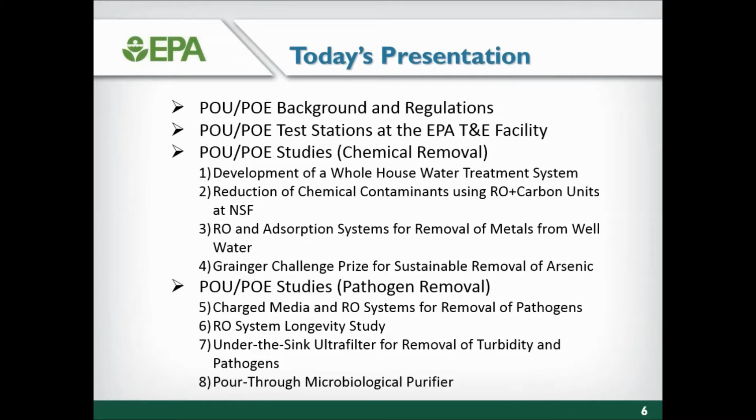The research studies described in this webinar are designed to provide background on the capabilities and testing protocols of household water systems. In today's presentation, I will quickly go over general background and regulatory implications regarding the use of point of use and point of entry, or POU, POE devices. This presentation will focus on the chemical and microbiological removal capabilities of household water systems based on studies conducted at the U.S. EPA Test and Evaluation Facility in Cincinnati, Ohio. Later, Cindy Clevens will provide a regulatory perspective on the use of POU devices in New Hampshire.

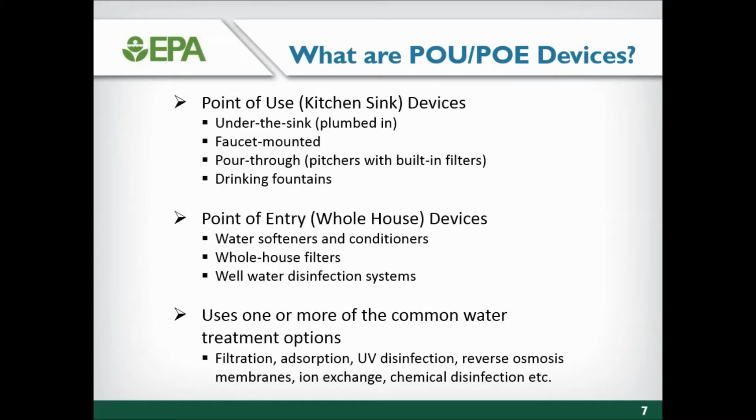Point of use or kitchen sink devices are installed at or under the sink or on the end of the faucet and treat only water used for drinking. Point of entry, or whole house devices, treat all the water entering a building. POU and POE devices typically use one or more common water treatment options like filtration, adsorption, UV disinfection, reverse osmosis membranes, ion exchange, and/or chemical disinfection.

Point-of-use devices can provide consumers in homes, businesses, and apartment buildings with clean drinking water with improved taste. They can be designed to remove specific contaminants or may inadvertently remove unregulated contaminants from potable water.

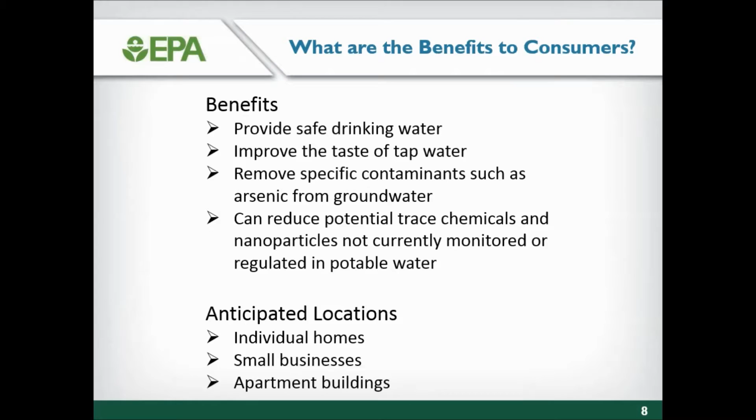POU systems can prevent illness and improve public health if properly selected, installed, operated, and maintained. They can protect households from untreated water and treated water that has been contaminated in the distribution system. However, they are designed for clean water sources or tap water and should not be relied on for untreated water or wastewater except during emergency situations.

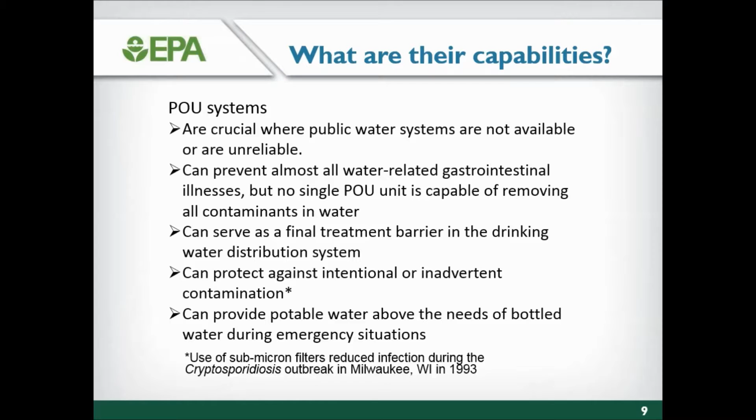POU devices must be owned, controlled, and maintained by the public water system or by a contractor hired by the public water system for compliance with an MCL, and must include mechanical warnings or auto shut-off capability.

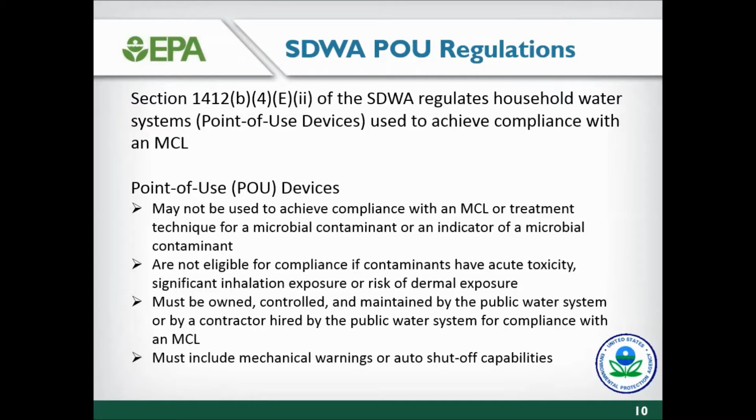Only POU devices that have been independently certified in accordance with ANSI NSF standards can be used as part of a compliance strategy. Several nonprofit organizations in the U.S. independently certify POU devices or verify their removal capabilities, including NSF International, Underwriters Laboratories, and the Water Quality Association.

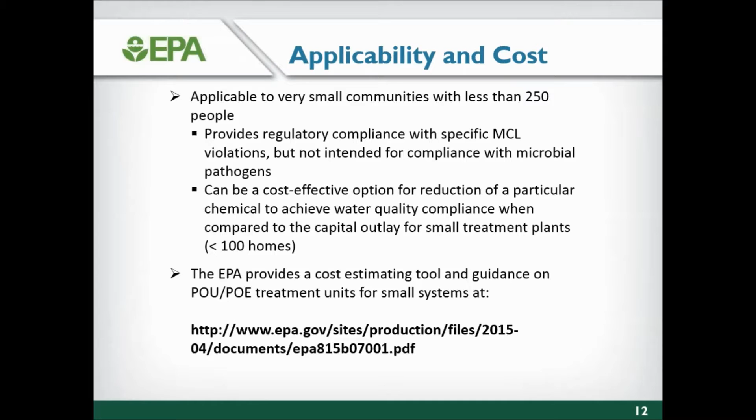Household water treatment systems are applicable for regulatory compliance in very small communities of less than 250 people. POE devices can be a cost-effective alternative for chemical removal in communities of less than 100 homes. EPA has developed a cost estimating tool for POE treatment units with guidance at the website link shown here.

The U.S. EPA Test and Evaluation Facility in Cincinnati, Ohio is a multifaceted research facility with bench, pilot, and full-scale environmental systems. The high bay supports a point-of-entry test station, supporting relatively high flow rates and continuous monitoring of several water quality parameters.

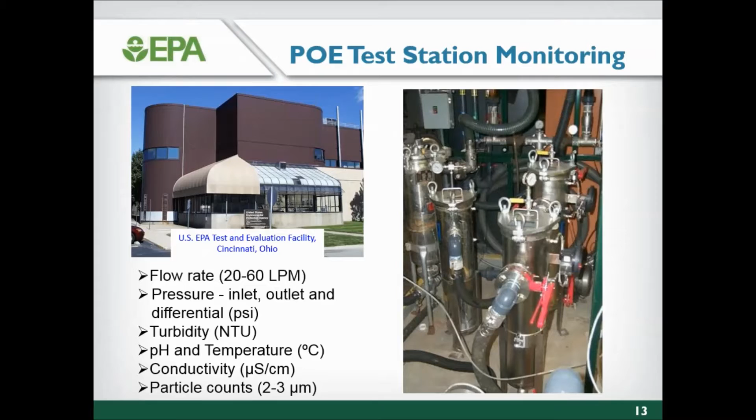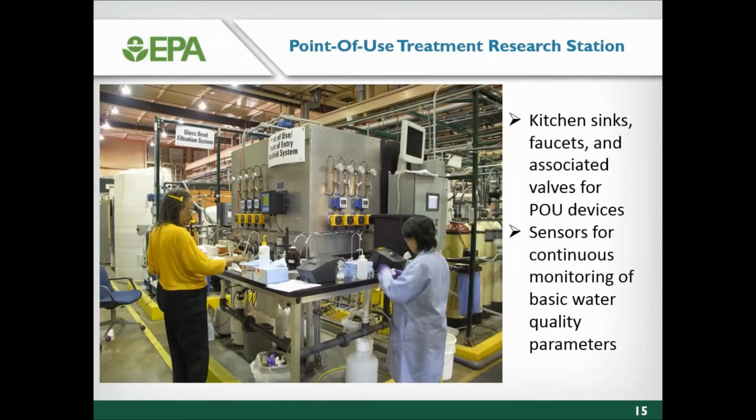The T&E facility also has a point-of-use test station with 2 kitchen sinks and 5 point-of-use faucets and continuous monitoring of water quality parameters. On slide 16, Cincinnati tap water is dechlorinated and deionized for use as a point-of-use test water. Test water is then recreated based on the desired experimental water quality and contaminants of concern. Automated sensors are capable of tracking and data logging flow rates and water quality parameters throughout the POU research studies.

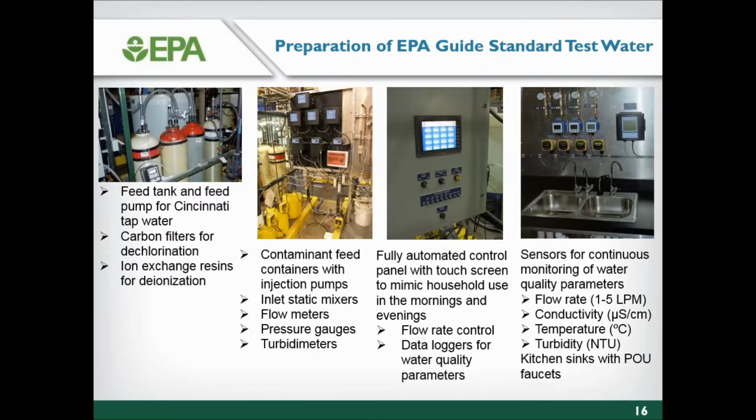Point of entry study number 1 was conducted on composite cartridge filters with UV lamps. EPA and Harmsco Filtration Products developed a Cooperative Research and Development Agreement, or CRADA, to study the household water system shown here. Harmsco is based in Florida, where source and tap waters typically have a yellow tinge. This 15-gallon per minute household filter is capable of removing the yellow color, inactivating pathogens, and improving the taste of drinking water in the home.

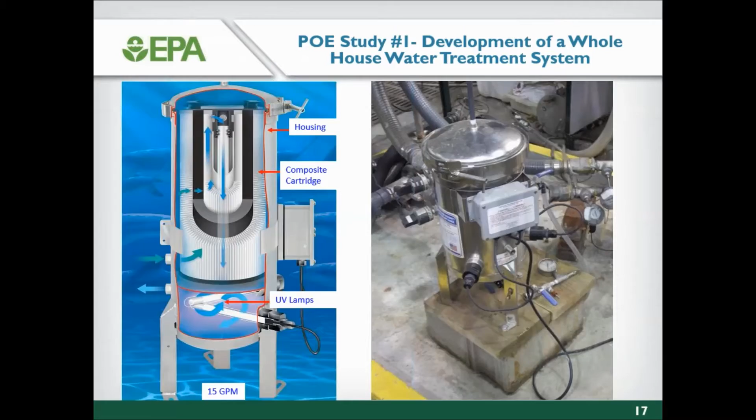The composite cartridge filter media is constructed of an antimicrobial pleated 20-micron outer filter, an activated carbon extrusion, and an antimicrobial pleated inner filter with a nominal pore size of 2 microns. Filtered water is then disinfected with low-pressure UV lamps.

The composite cartridge system demonstrates removal of turbidity and cryptosized particles. For influent turbidity levels between 1 and 3 NTU, the effluent quality did not deteriorate due to the dirty condition of the filter and high feedwater turbidity. However, the head loss pressure increased rapidly, indicating the need for low feedwater turbidities.

The system showed excellent removal of chlorine, trihalomethanes, and diazinon insecticide, and adequate removal of MTBE and haloacetic acids. The extruded carbon was blended with ferric hydroxide for arsenic removal with negligible results.

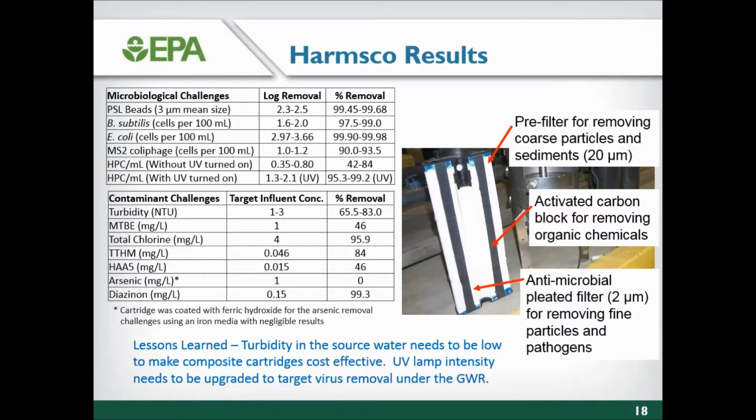Under lessons learned, these studies were focused on the removal of cryptosporidium under the long-term 2 enhanced surface water treatment rule. Now that the focus has shifted to virus removal under the groundwater rule, the UV lamp intensity needs to be upgraded to target UV-resistant viruses such as adenovirus.

On slide 19, in POU study number 2, EPA and NSF studied the reduction of chemical contaminants in off-the-shelf reverse osmosis and carbon units. Experimental testing of multiple lots of multi-stage kitchen sink systems was completed at NSF in Ann Arbor, Michigan. After preconditioned service periods, RO membrane components were studied first without sediment or carbon filters.

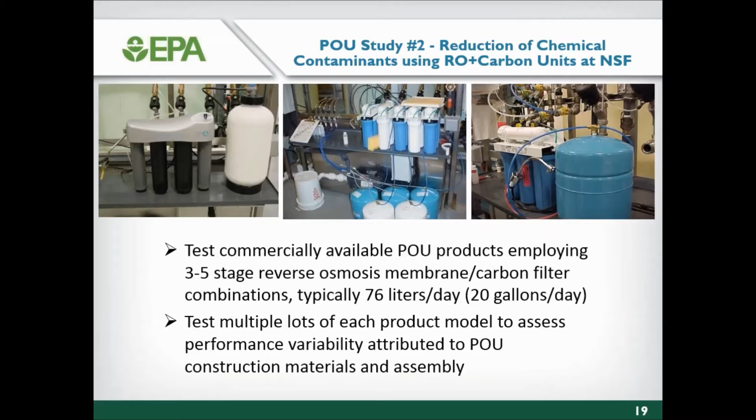Individual chemicals were studied over 6 accumulator tank fill periods. Post-membrane carbon filters were challenged separately. Carbon filters were conditioned with water containing 300 parts per billion of chloroform to simulate loading halfway through the lifespan.

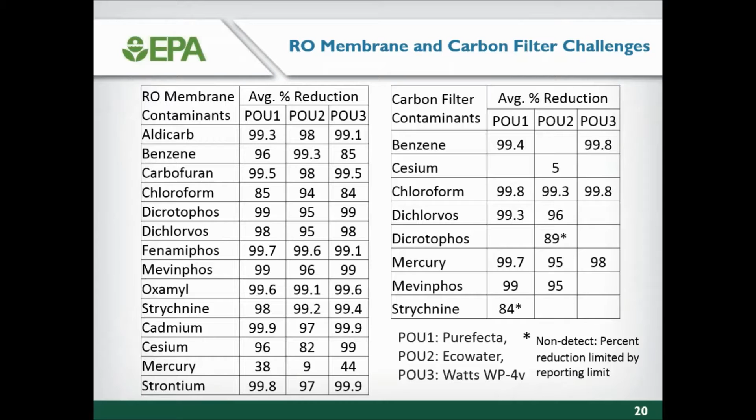Chemical reductions were 99% for most chemicals with the RO plus carbon combination. However, some units showed challenged chemicals in their effluents. Chemical exposure did not cause membrane or seal degradation.

In POU study number 3, EPA Region 7 specified and deployed point-of-use devices in homes with contaminated private wells in 4 mine waste areas of Washington County, Missouri.

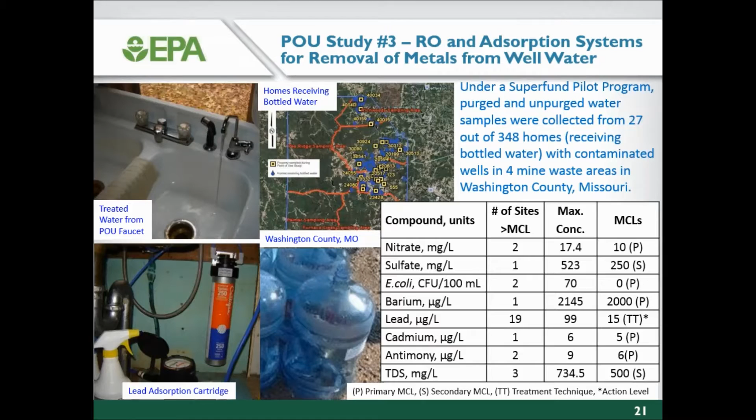Purged and unpurged water samples were collected from 27 out of 348 homes with contaminated well water. Results showed that 19 homes, 70% of the 27 homes, had lead concentrations above the action level of 15 micrograms per liter.

A decision tree was prepared to determine which point-of-use device was applicable and how to maintain it based on well water quality. If the homes with private wells had low line pressure, an RO permeate pump and a booster pump were installed to speed up the treatment time and make more drinking water readily available to the household.

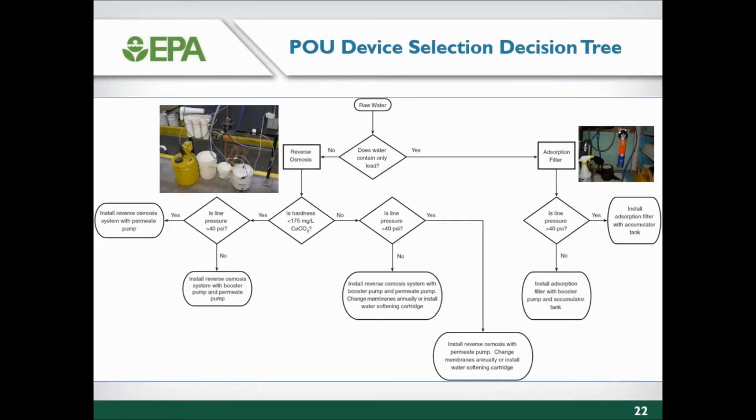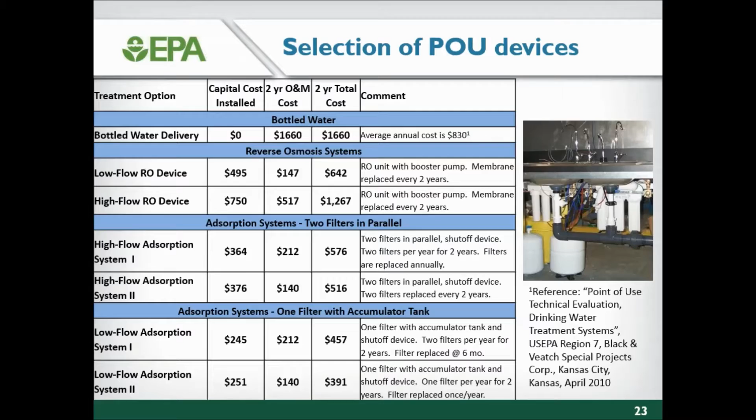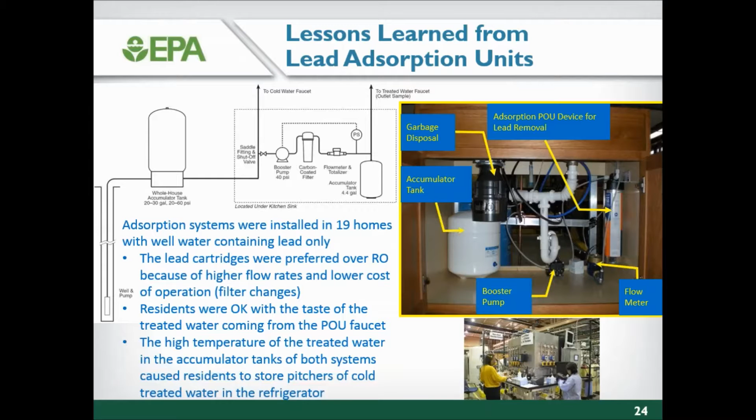The high temperature of the treated water coming from the accumulator tanks for both adsorption and RO systems caused residents to store pitchers of cold treated water in the refrigerator.

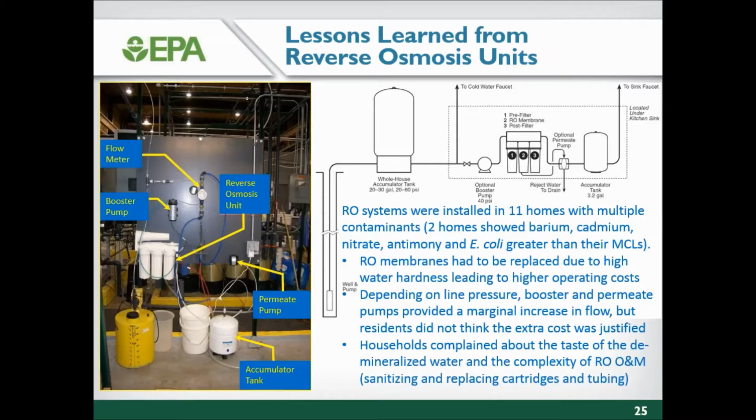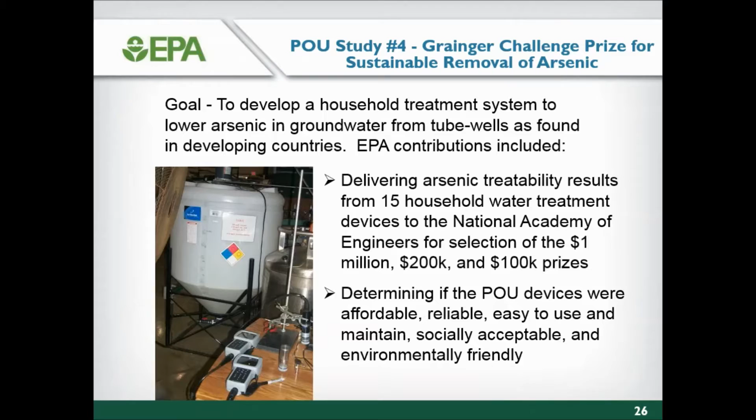On slide 26, high levels of arsenic in tube wells is a major health concern for millions of people in developing countries. In POU study number 4, the EPA Test and Evaluation Facility was chosen by the National Academy of Engineers to study arsenic removal from 15 point-of-use devices to determine the winners of the $1 million Grainger Challenge. The winning systems had to be affordable, reliable, easy to use and maintain, socially acceptable, and environmentally friendly.

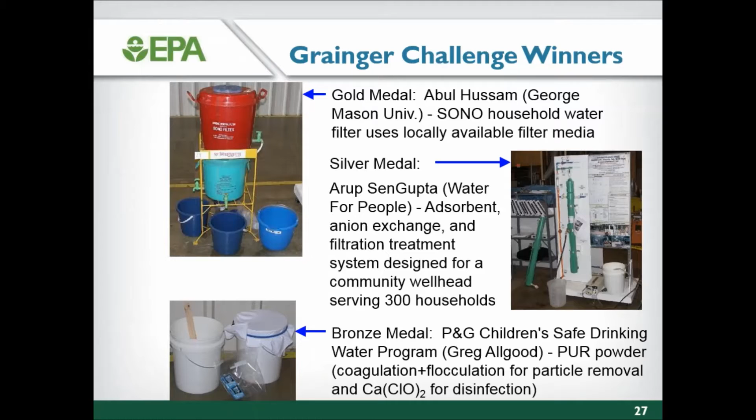A pour-through water filter that uses locally available filter media won the gold medal. A small community adsorption and filtration system won the silver medal, and a powder for particle removal and disinfection won the bronze medal.

As mentioned earlier, POU devices may not be used to achieve compliance with an MCL or treatment technique for a microbial contaminant or an indicator of a microbial contaminant. So what standards apply to POU devices for microbial pathogen removal?

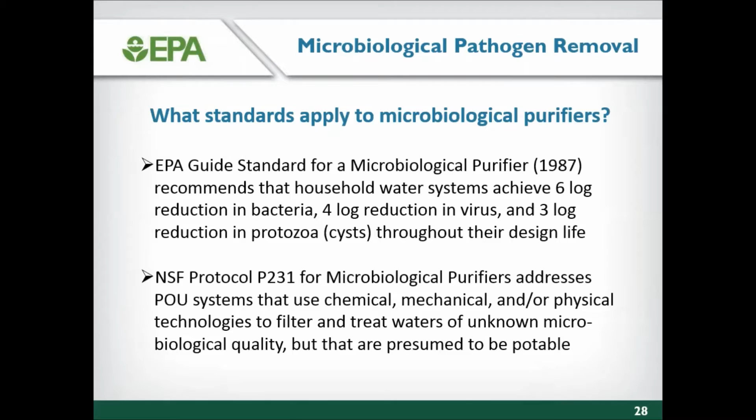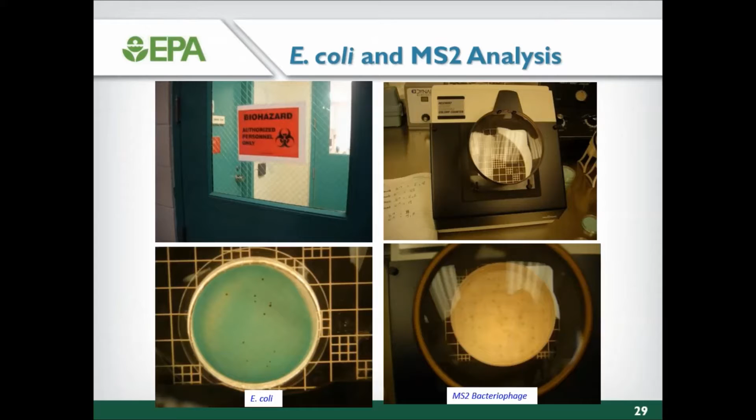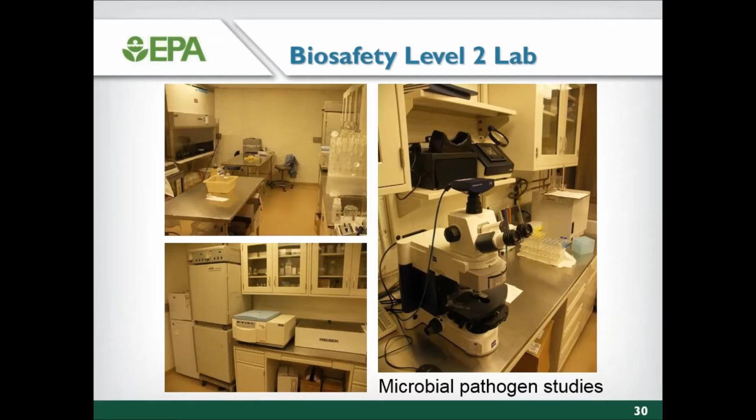The remaining studies in this presentation focus on the pathogen removal capabilities of various point-of-use devices. POU study number 5 provided a comparison of a reverse osmosis system and 2 charged media systems for pathogen removal.

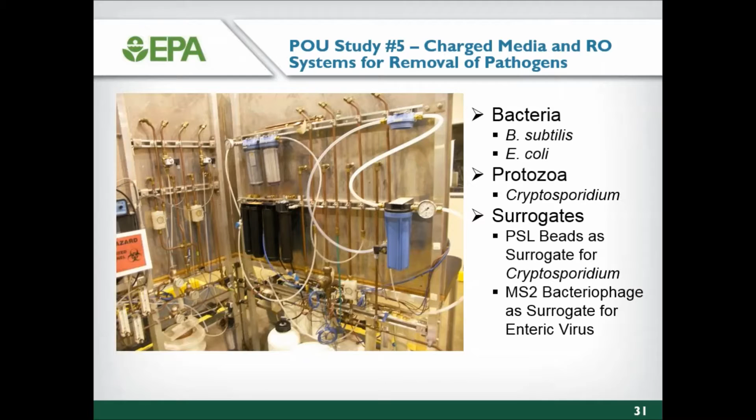So what is charged media? In the first case, it is a proprietary extruded carbon filter that has been modified for pathogen removal. The pleated pre-filter removes coarse particles, and the extruded carbon filter has a thermoplastic binder, a cationic polymer, a cationic silver complex, and pH-altering material.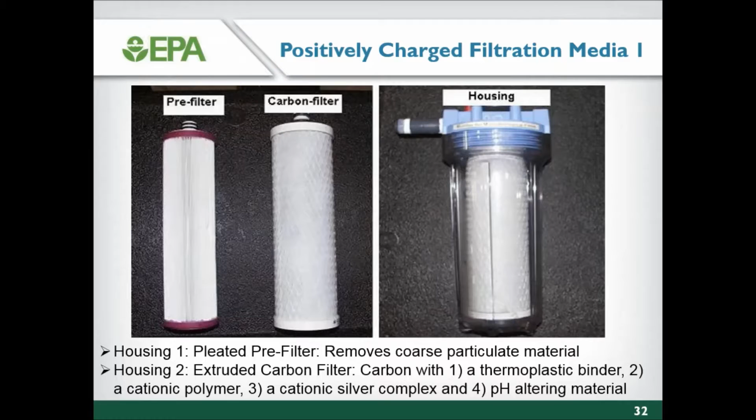In the second case, charged media is a proprietary molded carbon block that has been modified for pathogen removal. The pleated pre-filter removes coarse particles, and the molded carbon block is comprised of insoluble inorganic matter with a high isoelectric point, a low melt index binder, and a silver compound to suppress bacterial growth if used for an extended period of time.

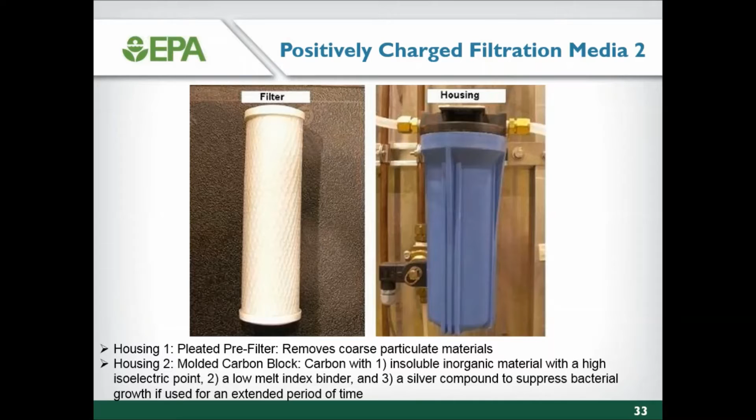For comparison with the charged media filters, a 3-stage RO system comprised of a carbon pre-filter for coarse particle removal, an RO membrane for removal of fine particles, chemicals, and pathogens, and a carbon post-filter for removal of odors and improved taste was included in this study.

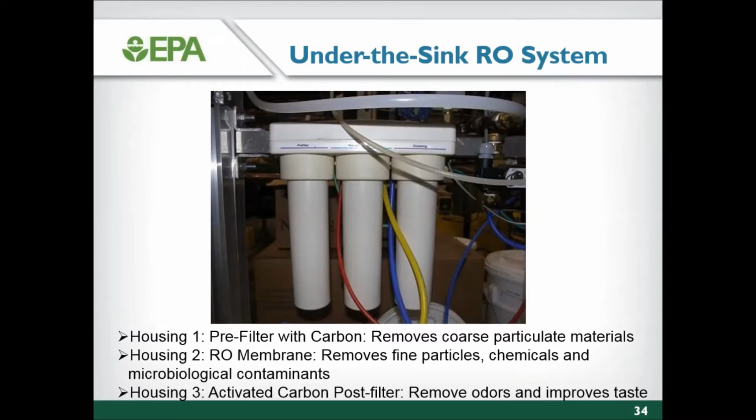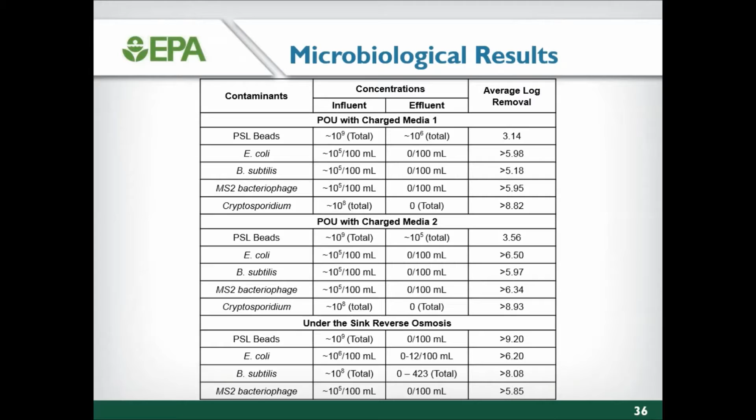All 3 POU devices demonstrated complete removal of bacteria, protozoa, and viruses as tested, and favorably met requirements of microbiological purifiers. The RO system performed better than charged media in removing PSL beads, a surrogate for Cryptosporidium.

What are microbial surrogates? Surrogate organisms are harmless microbes with correlated survival and growth parameters of a specific pathogen, in this case Cryptosporidium. By comparing crypto and surrogate results, it was found that Bacillus subtilis demonstrated better potential as a surrogate for Cryptosporidium in charged media systems than polystyrene latex beads. The complexity and cost of analysis was also lower for Bacillus subtilis.

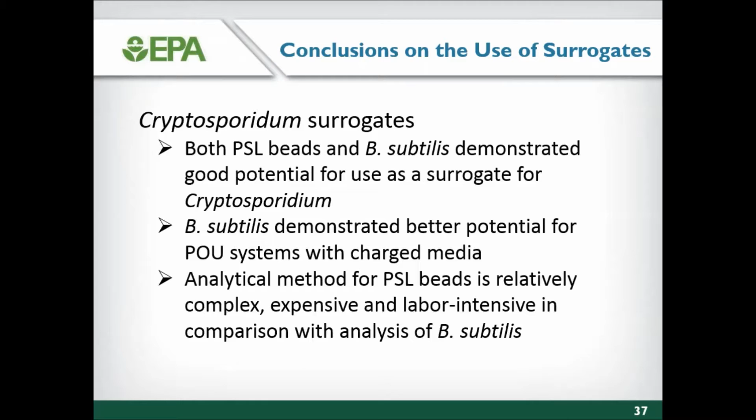On slide 38, in POU study number 6, EPA conducted long-term studies on 2 off-the-shelf 5-stage reverse osmosis units. The RO systems were operated to simulate start-stop sequences for typical household tap water usage. Both RO systems demonstrated excellent performance in removing microbial contaminants over 2 years of operation.

Both RO units had complete removal of crypto-sized beads for up to 670 days, and either complete or nearly complete removal of E. coli, Bacillus subtilis, and MS2 for up to 720 days.

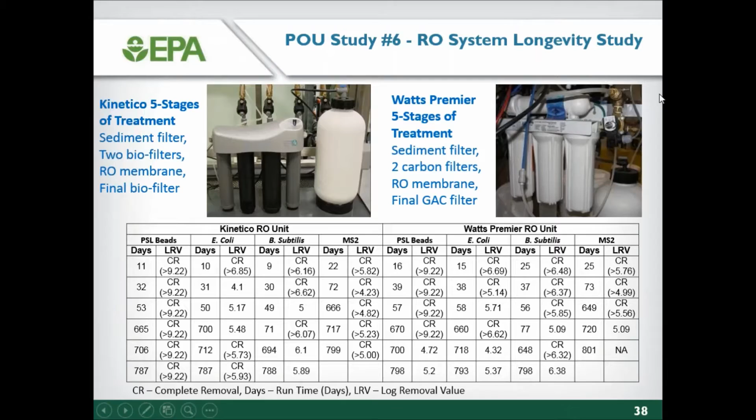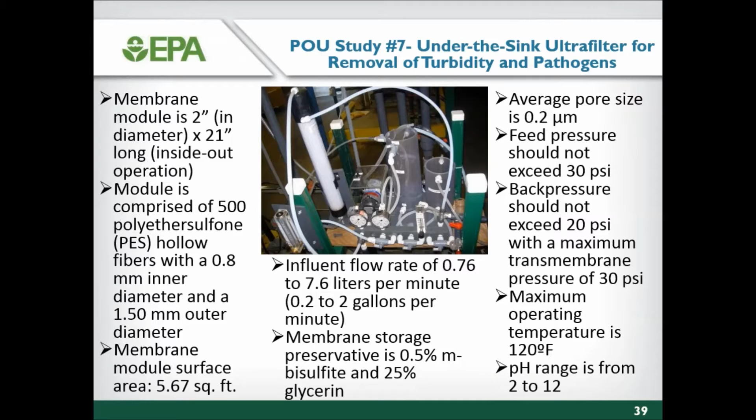Membrane-based filters require cleaning on a periodic basis depending on the source water quality. The UF system was backflushed when there was a 25% drop in filtrate flow rate. The clean-in-place mode was employed with sodium hydroxide and chlorine chemicals when backflushing was no longer an effective cleaning method.

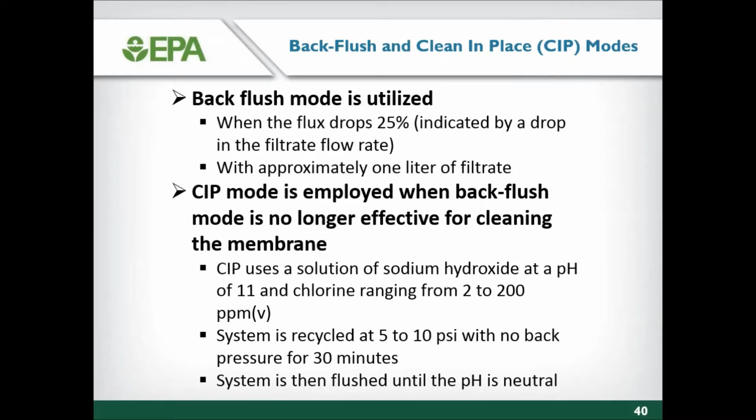So what is flux? Flux expresses the rate at which water permeates a membrane or filter, or how quickly the clean water comes out of the filter. Filtrate flux is the flow of product water divided by the surface area of the membrane in gallons per square foot per day at 68 degrees Fahrenheit.

The specific flux or permeability refers to the filtrate flux that has been normalized for transmembrane pressure and temperature. These membrane evaluation parameters are measured to normalize membrane performance during POU experimental test runs.

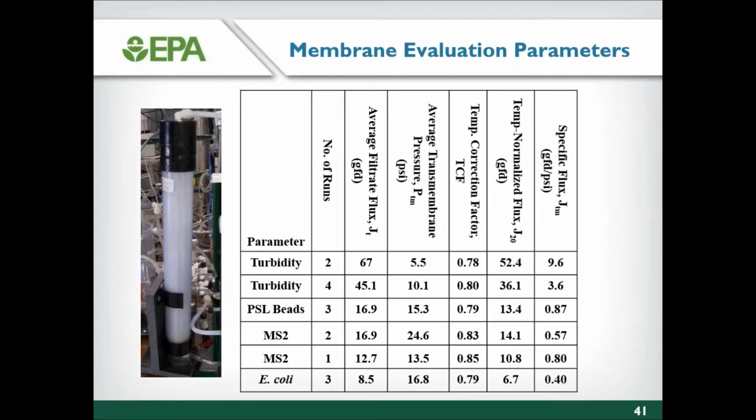The performance of the UF membrane increased with increasing turbidity level. The UF system produced water with a turbidity level of less than 0.18 NTU. 5 of the 6 turbidity runs produced effluent water with an average turbidity of less than 0.15 NTU. The surface water treatment rule requires at least 95% of the samples per month to be less than 0.15 NTU. The UF system also removed 98% of the particles in the crypto size range of 2 to 5 microns.

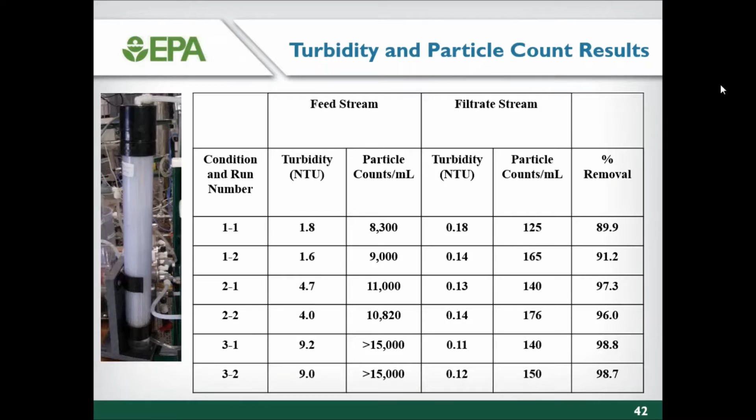In these POU experimental test runs, the UF system demonstrated complete removal of crypto-sized 3 micron beads, 5 log removal of E. coli, and 6 log removal of MS2 bacteriophage.

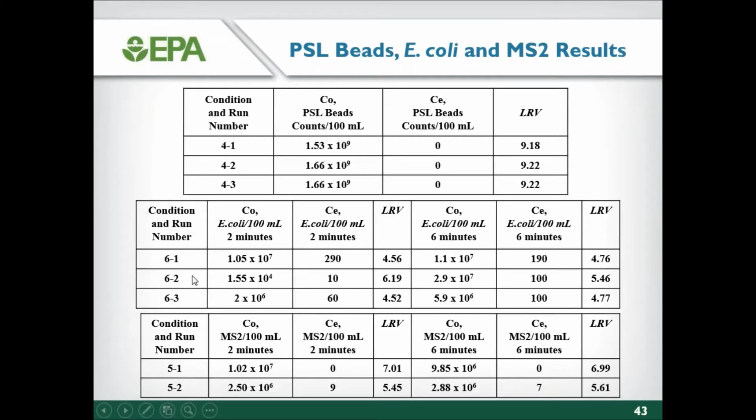The bag filter is cleaned by backwashing the filter under a faucet to remove accumulated dirt. The system superchlorinates water and scavenges residual chlorine and chlorinated byproducts using activated carbon. When the chlorine disinfectant tablet completely dissolves, the system shuts down automatically until all 3 consumables, the sediment bag filter, the chlorine tablet, and the carbon cartridge, are replaced at the same time.

New models like the Pureit Excella now have microfiber mesh filters in the top chamber and microcharge membranes in the collection chamber to physically remove protozoans like Crypto and Giardia.

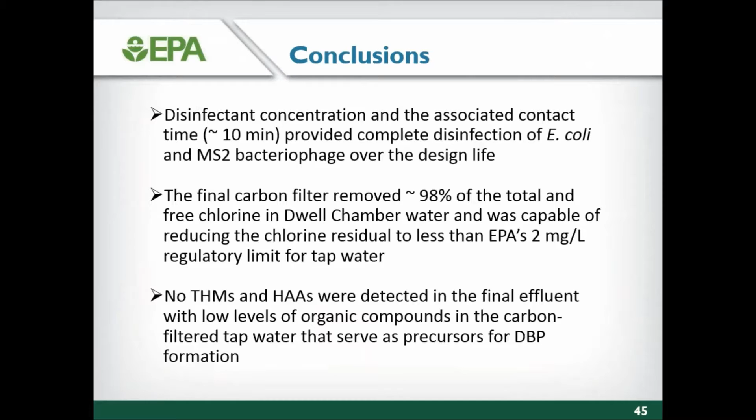On slide 45, the study found complete disinfection of E. coli and MS2 over the design life of the product. The carbon filter removed 98% of chlorine after disinfection. No disinfection byproducts were detected in the treated water, but additional tests using a source water with natural organic matter are recommended to evaluate DBP control.

Links to EPA reports, journal articles, and conference proceeding papers are listed for further information on specific details of these research studies.

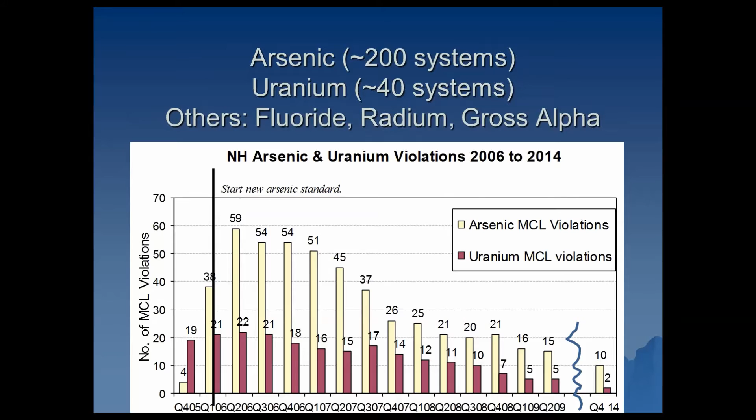In addition to arsenic, we also have other chronic contaminants like uranium, gross alpha, radium, and fluoride that are well suited for point of use treatment, depending on the situation.

For arsenic in particular, I'm showing the different technologies we've used. Most of those are point of entry or centralized treatment, but about 10 or 11% of our systems have used point of use for arsenic. We also have a couple of community systems doing uranium treatment as point of use.

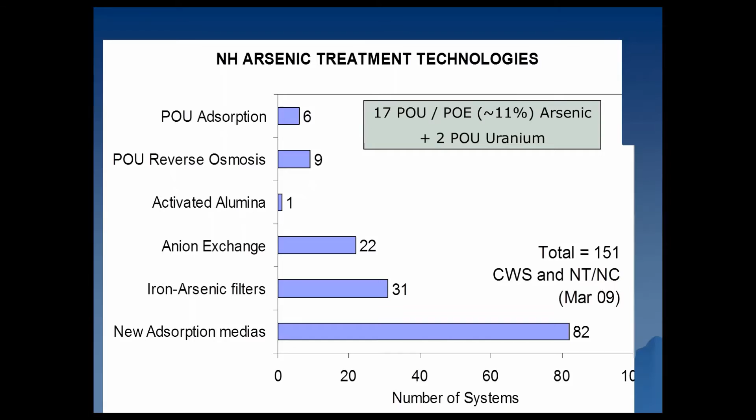Why do we like point of use? Well, for small businesses in particular, it has been very useful to reduce the amount of water to be treated, and the cost, obviously, for treatment.

For small community systems, especially in a rural state like New Hampshire, we have no place to do an on-site discharge. So point of use is sometimes the only option, other than installing a new well or being able to blend. For very small community systems, often point of use might be the only option for compliance.

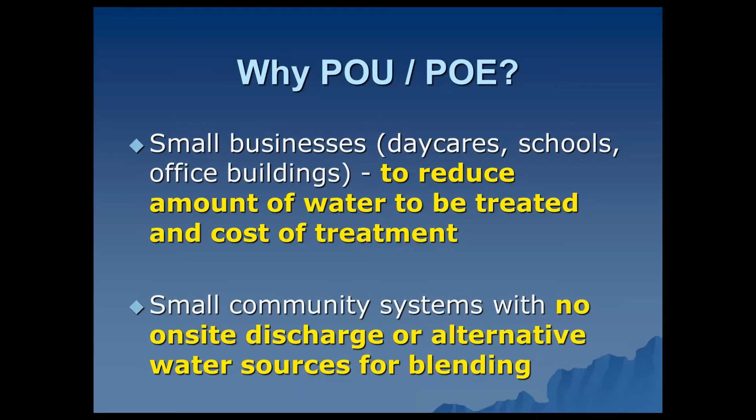We've developed some fact sheets about on-site disposal for backwashes into septic systems, which we only allow discharge to a septic system if it's a community septic, like for a school that would have all the water treated for that school discharged into a single septic. But most community systems, as you probably are aware, have individual septic systems, so that option was not available, making centralized treatment not feasible.

So I've listed some definitions that we've used. Point of use and point of entry are the same definitions as federal: point of use for a single tap in a home, point of entry a treatment device for the entire home or a building.

And then we have one that we call dual plumbing, which we've used in a few instances, such as schools and small businesses, where the water system has installed a separate set of plumbing for potable uses only. So we've classified that as a dual plumbing system.

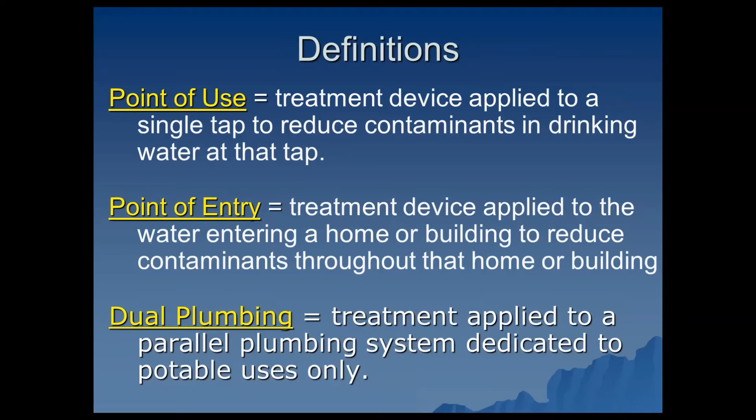Our regulations for decentralized treatment are in Env-Dw 723. They're online for any other states that want to review them. Essentially, the requirements are...

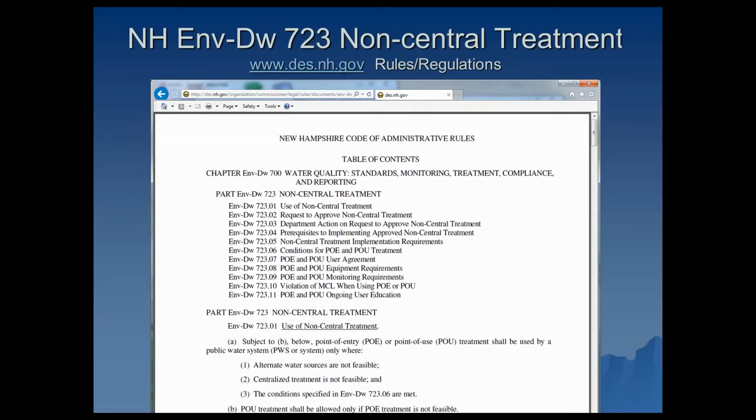That central treatment or blending is not feasible. Based on federal requirements, in our state rules we also have that point of use will not be allowed for acute contaminants such as bacteria, nitrate, and of course for volatile contaminants like VOCs.

The other requirement in our rules is that each of the users, for example in the community system, there needs to be written acceptance, a letter from each of the homeowners that accepts the use of point of use technology as a compliance means to meet the drinking water standards.

What we've done is we have two letters. One is an agreement, a model letter that we've used. They agree to and understand that they're using a point of use device, and that all water for consumption should come from that faucet.

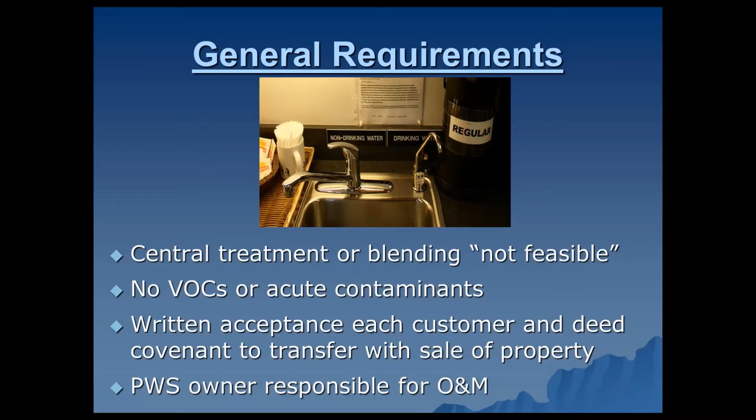I don't have a model of the second letter here, but it's the intent to transfer the point of use agreement when they sell their home, so that's included in their deed to a new homeowner. And then finally, again based on federal requirements, the water system owner is responsible for the operation and maintenance.

For non-community systems, non-transient non-community, we require that they have postings at each of the sinks. For example, it would say non-potable for washing only, use treated water for consumption in the break room kitchen sink, or whichever sink has the point of use device.

We require annual sampling for each point of use device for community systems, and quarterly sampling for non-transient non-communities. There's also an education requirement in the rules that says they will do an annual notice, for example with the CCR for a community system, or have a posting on a central bulletin board, say at a daycare or school, where information is provided that the company or school has elected to use point of use as compliance for this standard.

When there are violations, our rules require that public notice be given to the customer with the exceedance, and correction is required within 7 days and retesting within another 7 days. So essentially it's a 2-week window to correct the unit and retest. If there are repeated violations, the state can rescind approval if there's recurring violations, and we've had some cases where we've had to go to administrative order for repeated violations.

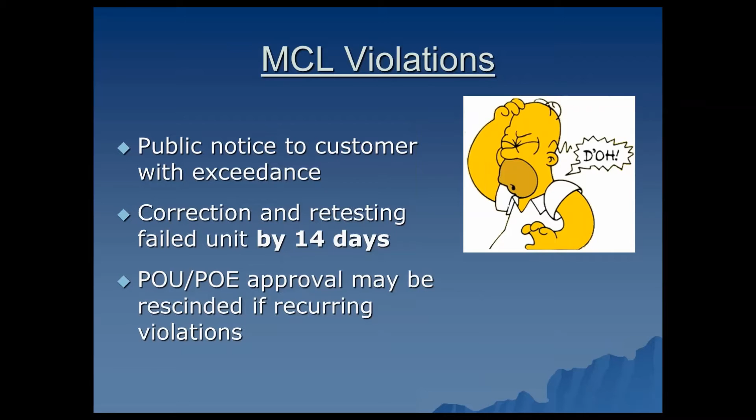So now to cover a few case studies, I want to share a couple of community systems. One is 15 homes for arsenic. Another is a uranium and fluoride point of use system in Tamworth. Another is the dual plumbing example, an auto dealership in Bow. And finally, one with 12 homes, a small system in Stratham, New Hampshire.

The Meeting House Senior Living Condominiums in Pembroke, New Hampshire has 15 homes. Their raw water arsenic was about 40. They installed this very early on, in May 2006, and have really had a great compliance history. Their maintenance has had no problems or violations that we've heard of at all. They have dual cartridges at each kitchen sink and sample once a year. It's been a great model for that.

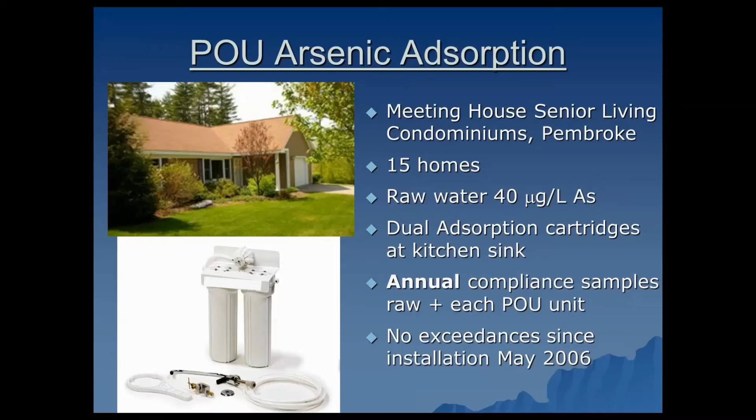The second one is a reverse osmosis point of use system treating both uranium and fluoride at a system called Chicora Meadows in Tamworth, New Hampshire. There are 21 homes there. The fluoride is close to 5 ppm, and uranium is between 28 to 58 or so parts per billion. They installed in 2007 and take their annual samples. They've missed a couple samples, but other than that have been okay. They corrected that oversight, and they've had the same operator as well, which is helpful. So it's been a good installation.

The next one is a pretty complicated one. It's at an auto dealership, a Honda dealership. They have about 40 employees.

The total well flow is about 15 gallons per minute, and we split off a side stream for drinking water of about 3 gallons per minute for potable. From that side stream, they are feeding 5 drinking water locations that are accessible for the employee break rooms and the public, where they serve coffee and water.

What they have, there's many contaminants in this water: iron, manganese, MTBE, radon, and arsenic. So all the flow is treated by cation exchange, aeration for the radon, and carbon for MTBE.

The potable line has some redundant systems. It has a reverse osmosis. They have an activated alumina cartridge as a redundant treatment, and then a calcite and a carbon cartridge after the RO, just to remineralize the water and give it some taste back. We do quarterly sampling at this system.

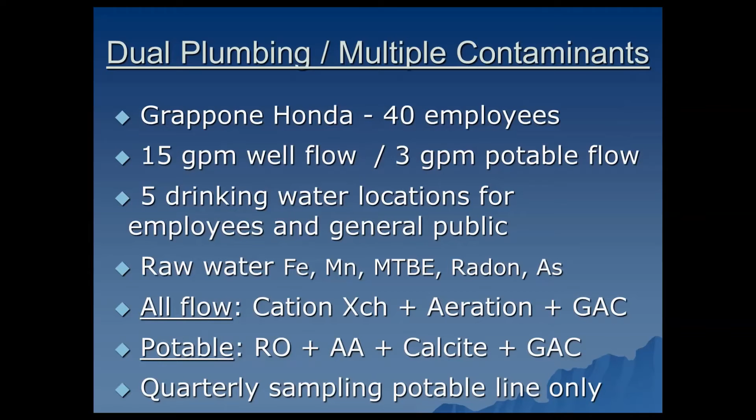Finally, a small community system in Stratham. Only 12 homes. The reason we regulate them as a public water system, or we did regulate them as a public water system, was because the occupancy brought them over 25 people. They had 25 parts per billion or so of arsenic, and then some iron and hardness as well in the raw water. But their pump house was in pretty bad condition.

It really wasn't large enough to house central treatment. So because of the size, we accepted point of use as an option. However, each of the homeowners here had different tolerances or different preferences, really. So our rules also allow that they can install additional equipment if they desire, above the minimum, if they wanted to do some secondary treatment in addition to the main contaminant.

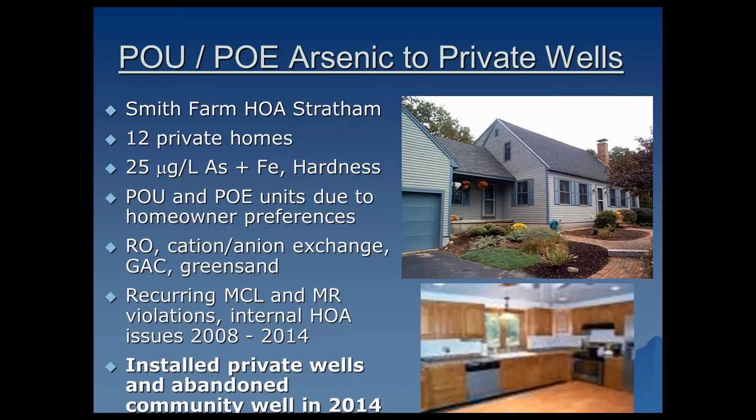Just on costs a little bit: anywhere from, for the point of use devices for arsenic or even reverse osmosis, range anywhere from $150 to about $1,200 per unit is what we're finding. We recommend, of course, that any unit purchased be NSF certified for the particular contaminant.

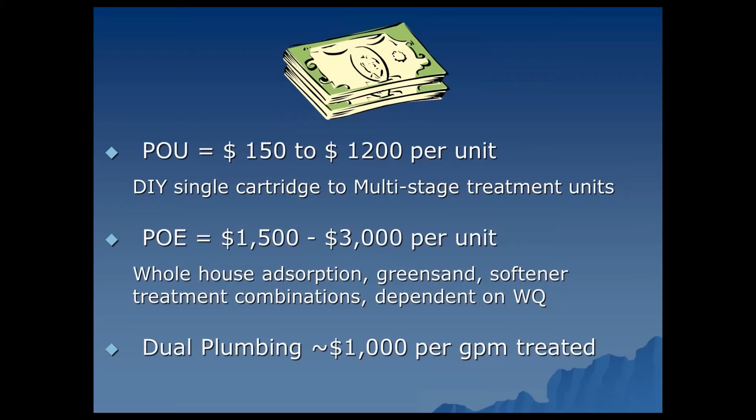Point of entry devices in New Hampshire range from about $1,500 to about $3,000 per unit. If they have several combinations, then we have seen costs up to $10,000 or so for a single home treatment system. It can get pretty expensive. And then for dual plumbing, the rule of thumb has been about $1,000 per gallon per minute. So say a 10-gallon per minute well would come in about $10,000 for capital costs.

Problems that we've had with these rules: number one, just to get everyone to agree for the initial letters is not as easy as it should seem. Not everybody comes to the homeowner meetings, for different reasons, but just to get those individual commitment letters sometimes takes quite a while, and enforcement from us in order to push the process along.

Another problem is that, depending on the number of units, as I showed, there's 15 homes, 21 homes. Our largest point of use system is 21 homes, but that means we have 21 sampling sites in the water system. So it's a monitoring hassle for the additional sampling sites. Our bureau is not so happy with the additional paperwork that needs to be prepared for the decentralized units.

Of course, additional sampling effort is required by the operator. Generally, one trip to pick up the samples is not enough, so they get half the samples and then have to come back multiple times.